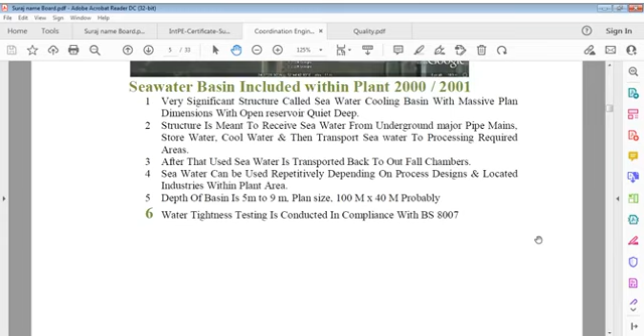So in this I have taken many of these projects which I am showing to you, these images, of my own projects, directly or indirectly I was involved. Only a few of these projects can I show to you that sometimes I was involved in during my career, and I'd like to discuss these with you.

It was constructed in 1986. I was on behalf of the contractor's agent for this, and this was my first major project, you can say, major in the sense of the Gulf, not otherwise. I did many projects before also, but not in the Gulf, GCC countries. GCC means Gulf Cooperation Council.

Gulf means there are countries like UAE, Saudi Arabia, Bahrain, Kuwait, Oman, and Qatar. This is a group of Gulf countries, all Arab countries. Here I joined GCC countries for the first time. Before that I had worked in Iraq and Libya, but due to some reasons I joined Qatar. Capital is Doha, a very small and beautiful country, of course.

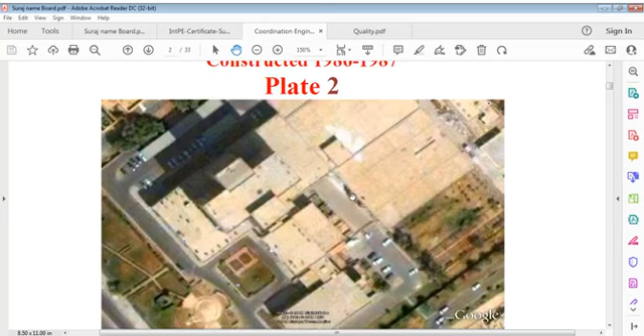This is the highest tower among this group, and I concentrated on this tower portion as well as other items on the other buildings. This was in 1980, 84, 83. This was good work.

As I said, in Qatar this is also the same, but here quality control was at a very high level. In fact, if I could learn something to an extent, quality is related - that's why I say here, quality engineering is related to coordination engineering. Coordination and quality both were there, not that there was no system.

I have seen, for the first time, thousands and thousands of documents - big size drawings, A0, and many piles, with no time to study them. Of course, we are not the main contractor here.

There was another company from whom our company got the subcontract, or you can say contract, for concreting - the structural contract. And it was not lump sum for this project, for us, not for the Jordan company. Whether they were lump sum or not, I don't know. We got this contract from them, and we had to take care of these items at unit rates, but technical work we had to do, and that was an important part - engineering work, whatever was possible in this construction, other than total engineering - construction engineering.

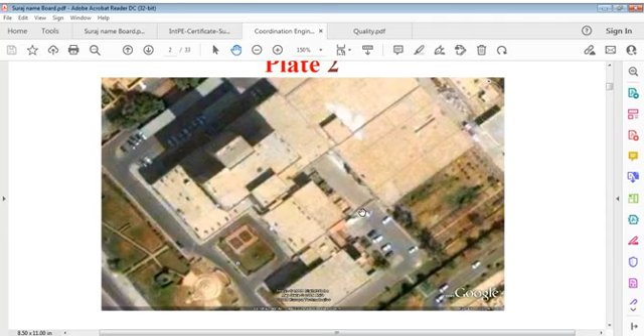Then after that I went to Libya, which I don't have any details with me. I'll just give you a brief reference of this. And this is a project photograph, this is from the ethylene plant. It was quite big, and I stayed on this project for about 3 years, dealing with structural concrete.

I was actually not project manager on this project. I was office engineer, project office engineer who deals with, you can say, quality coordination and miscellaneous types of works, or generally major technical office work, which comes to the responsibility or supportive responsibility of the office engineer. Until that time I could not understand what is office engineer. It means office activities were being responded to by the office engineer, and those activities.

First I joined this as a site person. I was taken into this job, and I was asked, do you want to do site work or do you want to do office work? I could not understand what they meant by that, but I said, whatever you want to give me, whatever you want to issue me, I'll do that, no problem. But then you tell us. Anyway, first push was to site. I was sent to site for work in that project.

I had many foundations to do, and I did that. Of course, I had some disputes with other foremen - they could not understand what I wanted. But we did work. I was involved in casting small foundations, combined footings, and also machine foundations, compressor foundations.

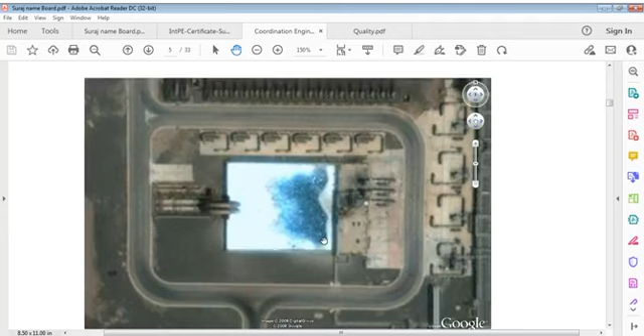There's nothing here, I'll give you that one, no problem. But let's just see what I'm talking about. And then plate 7, that's a small project, but a very important one.

This is a record house, a digital record house you can say. This is located in Qatar for client QP, Qatar Petroleum, and this is just outside the boundary of the operator Qatar Petroleum's side, the plant - this is the outside standby record center. It's called a very small building on a very small plot, but very strict.

I took over this site myself on behalf of our company, the contracting company, General Al Huda Contracting it was. You can see there is very small here, and here is the bound of this.

This is another big project on the other side of this, and here is all the residence, another building. So only this road is here, which is open to this site. This is the main building, this was the record building, very small but double story.

This is the guard house, a very RCC building, guard house. And here it is the service block - there are service blocks, transformers are put, electrical decompression and other provisions are put, pumps are put. And here's the water tank on ground, water tank, water reservoir. And then this boundary wall here, and there are such areas.

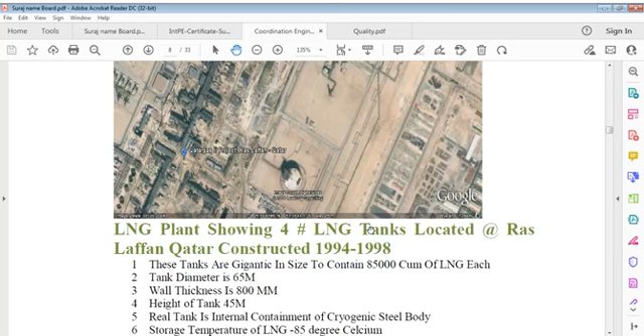I'll then go to - I'll read this all later, not now. I'm just trying to say what we do. So we come back to coordination engineering, which I'm talking about. I come back to these details. Let me go to what we're talking about. I'm talking about these projects. And again I say coordination is a must, it's a must, on every project it's a must. We can't do otherwise. If you don't have the will to do it best, let me take out this, put off this also. My switch off... battery.

Well, I think it's better to be very specific about it. Now, why am I doing coordination? The reason being, coordination - people don't understand in fact. I mean, they understand what coordination is, but they don't do it. And that's the drawback here.

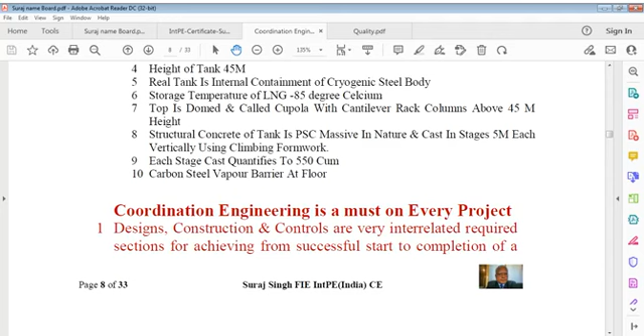Here I'm saying coordination engineering - this is important from each and every point of view. Let me blow it up a little more so you can see clearly. It's not coming in - I think it's coming in. It will come in like this. Okay, let us adjust this way. Let us keep 200 - okay, let me keep 180, that's better than 200.

So, okay, now why I'm staying on this - coordination engineering is a must on every project. It's a practical reason, a practical requirement. When I say titles are so much, this means here is so much. If we miss coordination, I think we do not work as engineers. I can say in that case that I'm not a good engineer if I don't coordinate. I'm not a good engineer if I don't worry about quality. And that's a very important point.

Some people may question why I'm raising this issue. Yes, I can answer that very easily: coordination is actually not seen. Coordination can't be seen as it is ongoing. Work only tells you that something was done. You can draw many drawings, all discipline drawings.

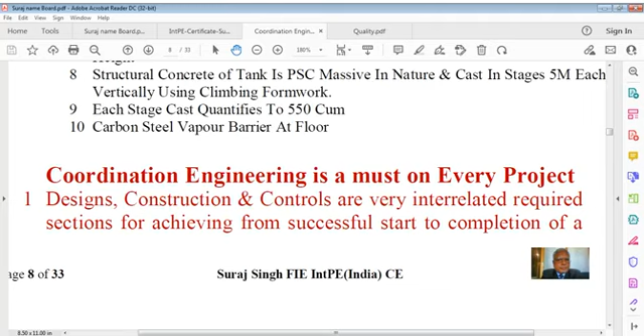People do not use this word in their life because they do not know its meaning. No issue - but design, construction and controls are very interrelated, required sections for achieving successful start to completion of a project, which must be applicable throughout project stages, with all works smoothly effective. Designs may be considered oversafe or optimum, but real construction involves actual expenses. So these are, I'm just reading what was already discussed, just to refresh what we have to discuss, the basis of that.

I'm just giving you input, as I gave last time also. Designs may be considered oversafe or optimum, but real construction involves actual expenses, contract time, financial liabilities, and building professional reputations. It should be a certain motto of an organization to apply good controls on the project so as to keep in line to schedule, planning being an actual part of controls.

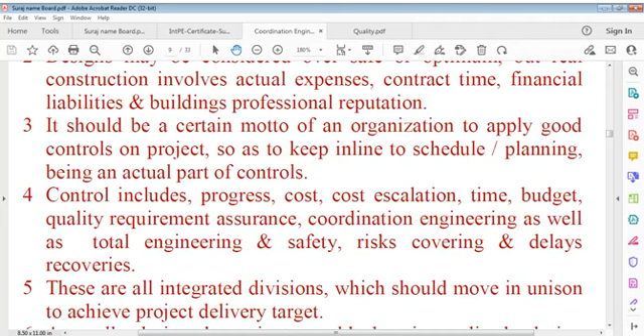Control includes progress, cost, escalation, time, budget, quality requirement assurance, coordination engineering as well as total engineering and safety, risk cover and delays - whatever. These are all integrated divisions which should move in unison to achieve project delivery target. A well-designed project could be jeopardized during the construction phase, from a budgetary viewpoint, if not given due required controls application properly - without organizing with full intensity, these types of problems can occur on a project.

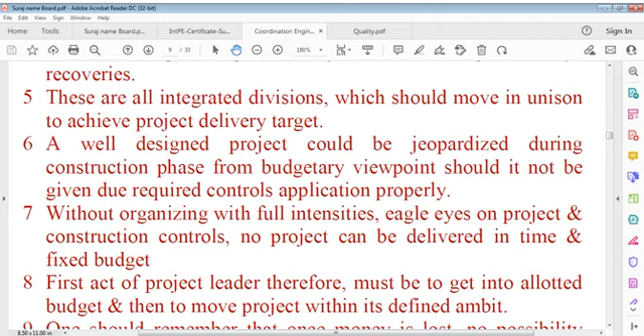And construction controls, you may say, no project can be delivered in time, in fixed budget. First act of project leader therefore must be to get into allotted budget and then to move project within its defined ambit. One should remember that once money is lost, no possibility exists to retrieve that lost money back.

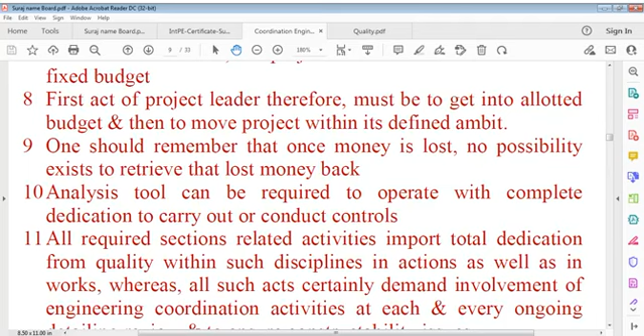Analysis requirement tool can be required to operate with complete dedication, carry out or conduct controls. All required sections related activities import total dedication from quality within such disciplines in actions as well as in works, whereas all such acts certainly demand involvement of engineering coordination activities at each and every ongoing detailing survey, detailing review, and to ensure constructability issues. So constructability is going to be main in this, it cannot be compromised at all. If you compromise that, you compromise everything. That's what I say.

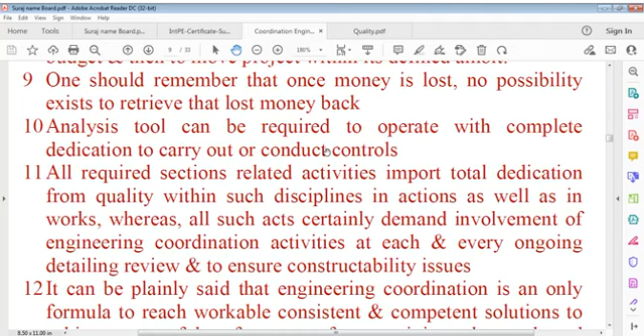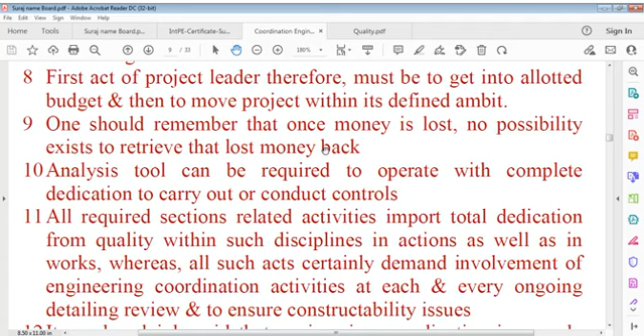So we may say, analysis tool can be required to operate with complete dedication to carry out conduct controls. And we have to understand all this, that once money is lost, no possibility exists to retrieve that lost money back. All these points you have to keep in mind. So we can say otherwise that

all required sections related activities import total dedication from quality within such disciplines in actions as well as in works, whereas all such acts certainly demand involvement of engineering coordination activities at each and every ongoing detailing review and to ensure constructability issue.

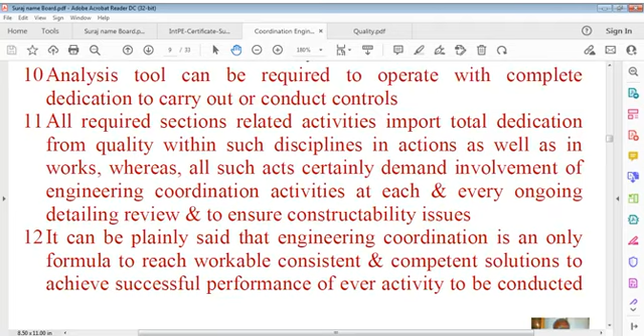It can be plainly said that engineering coordination is the only formula to reach workable, consistent and competent solution to achieve successful performance, of every activity to be conducted to avoid possible delays.

Actually, this is just an introduction. I had to go on in what we have to do. That is why we are here, to be clear about coordination. And I think people understand this, but I don't know to whom they leave it, to coordinate. Coordination is known to everybody. It's not known. Some understand this, some don't understand this.

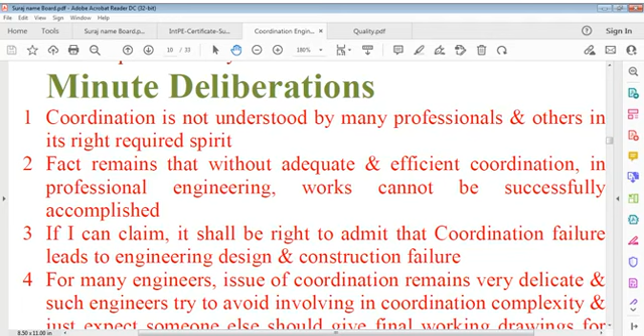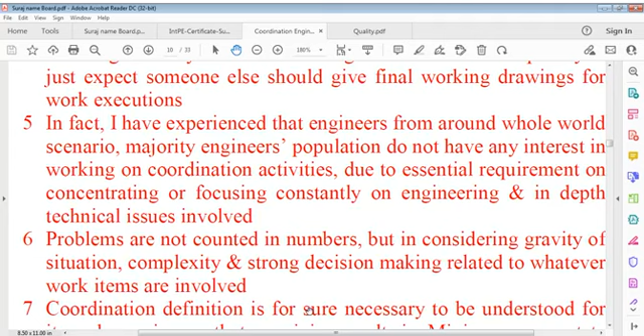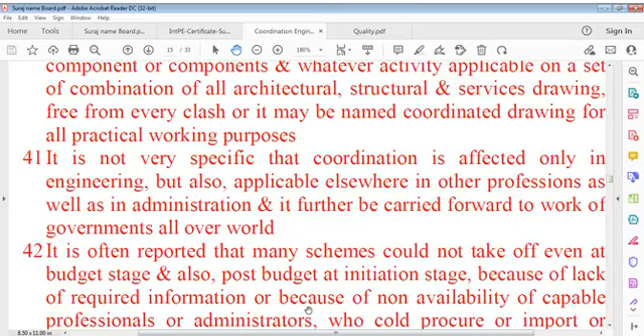But it's not formally decided, I can say that. If you go further on this, I'm not going to read all. We leave it to everybody else. But what we are going to do is that we have to. I reached up to some points last time. Which point I should start with? Let me see which is best for us to understand. 48 and 47. Let's say from here we can take.

While handling engineering projects, every engineer has to rely on certain specific disciplines. I'm just reading from here. While handling engineering projects, every engineer has to rely on certain specific disciplines or branches of various engineering disciplines.

So we have at least 15 branches of gross engineering and building engineers, or architectural engineers, or civil engineers, or structural engineers, or electromechanical engineers, security related engineers, information technology engineers, etc., as well as to carry out execution work at supervision level as well as at construction level.

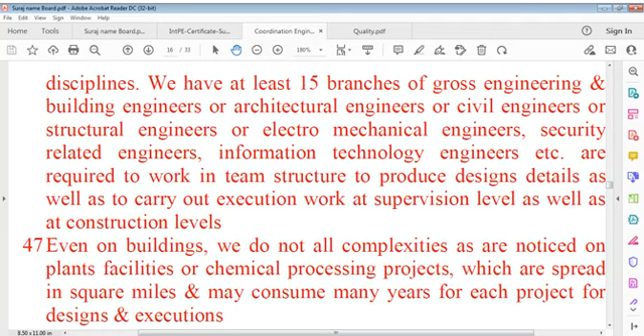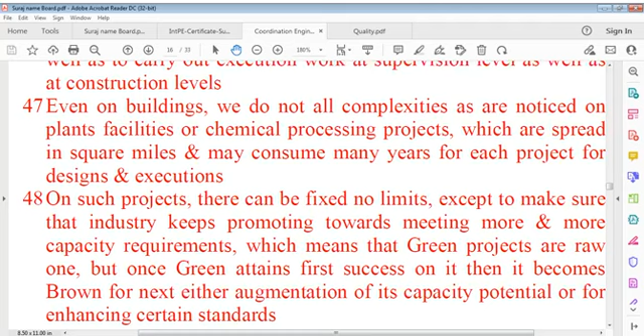Now, even on buildings, we do not see all complexities as are noticed on plants, facilities or chemical processing projects.

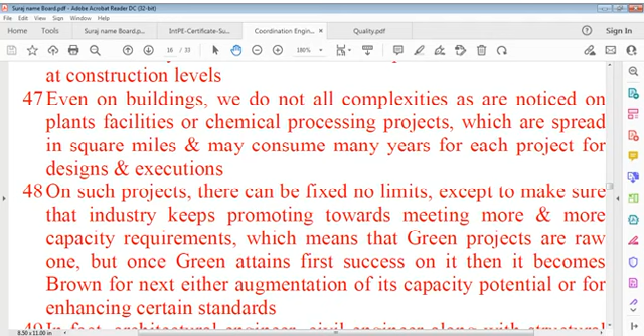On such projects, there can be fixed no limits, except to make sure that industry keeps promoting. Yes, you can keep promoting. Why say here, on such projects there can be fixed no limits except to make sure that industry keeps promoting towards meeting more and more capacity requirements, which means that green projects are now a raw one, but once green attains first success on it, it becomes brown for the next place.

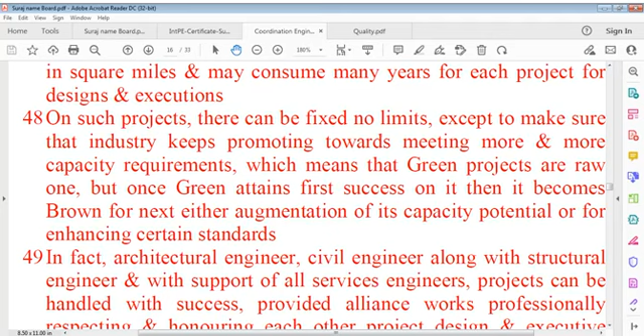Very, very serious issue. This is really coordination. It's not easy. You cannot perform it. Even if you're a doctor, you cannot perform it. If you don't have experience, I'm saying.

In fact, you can say on such projects there can be fixed no limits except to make sure that industry keeps promoting towards meeting more and more capacity requirements, which also means that green projects are raw one, but once green attains first, you can say success on it then it

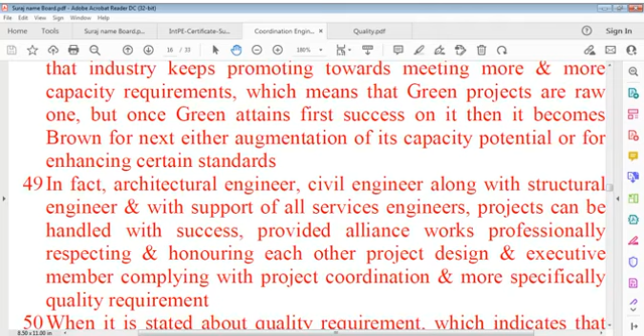That's in fact architectural engineer, civil engineers also, along with structural engineer and with support of all services. Engineers, projects can be handled with success, provide all the alliance works professionally, respecting and honoring each other, project design and executive member, complying with project coordination and more specifically quality requirement.

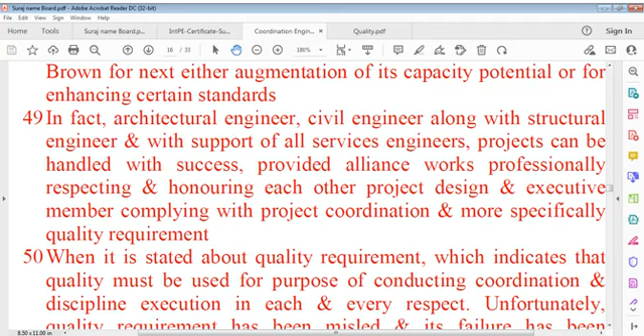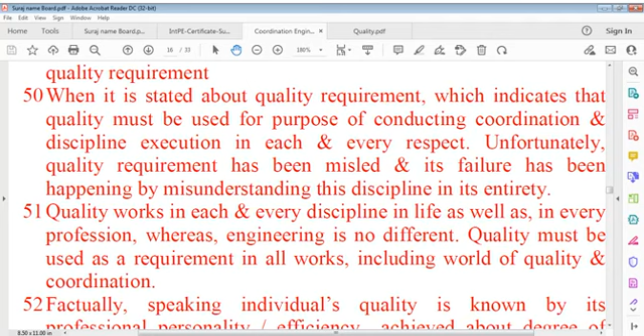When it is stated about quality requirement, which indicates that quality must be employed or used for purpose of conducting coordination and discipline execution, has been misled, or you can say, and its failure has been happening by misunderstanding this discipline in its entirety.

Quality works in each and every discipline, in life as well as in every profession. Whereas engineering is no different. Quality must be used as a requirement in all works, including world of quality and coordination.

Factually speaking, an individual's quality is known by its professional personality. Efficiency achieved about degree of work or production. Quality one possesses, and then further assessment can be calculated or charted out.

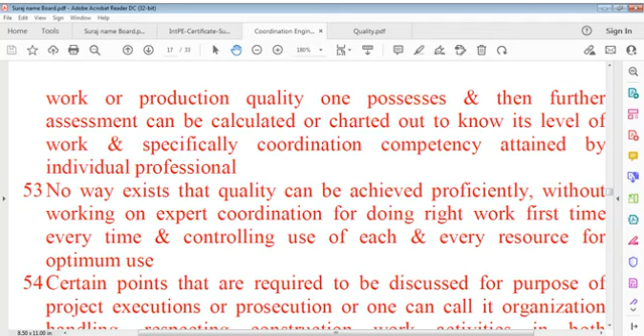So we have such points here, certain points that are required to be discussed for purpose of project execution or prosecution, or one can call it organization. Handling, respecting, construction work activities in both disciplines of site work as well as coordination, without which works cannot be completed in each and every respect.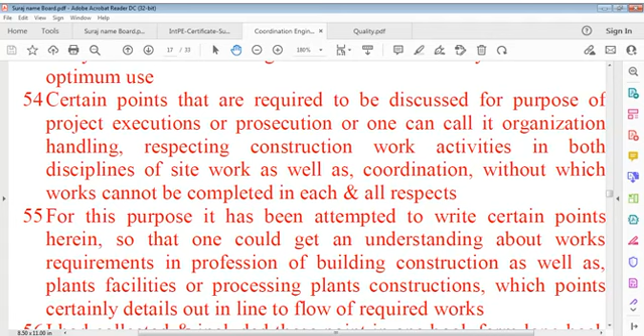For this purpose, it has been attempted to write certain points so that one could get an understanding about work requirements in profession of building construction as well as plants facilities or processing plants construction. Each point certainly details out in line to flow of required works.

I had collected certain information and included this point in one book long back. It has been too long, yet works are not changed in terms of quality and coordination despite availability of digital world everywhere.

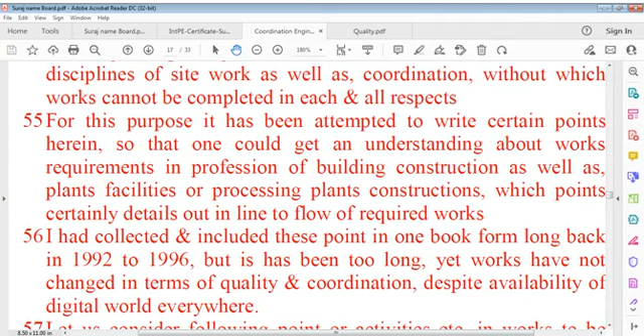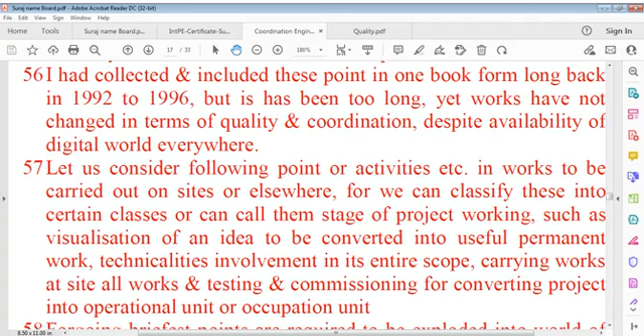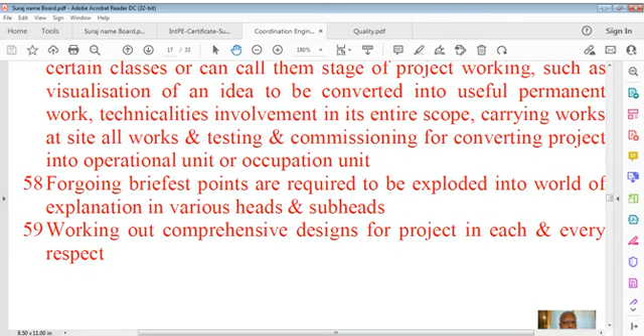Here we can say the foregoing briefest points are required to be exploded into world of explanation in various heads and subheads, working out comprehensive designs for project in each and every respect.

Now, designs include architectural details, structural details, service details, internal and external landscape and utilities, and many more without any fault. We have to do that.

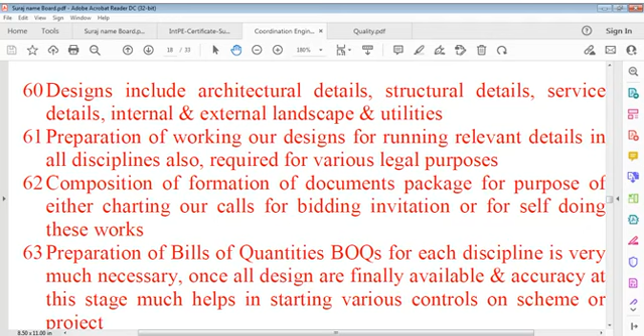Preparation of working designs for running relevant details in all disciplines also required for various legal purposes. Formation of documents, package for purpose of either charting out, calls for bidding, invitation, or for self doing these works. Preparations of bills of quantity for each discipline is very much necessary.

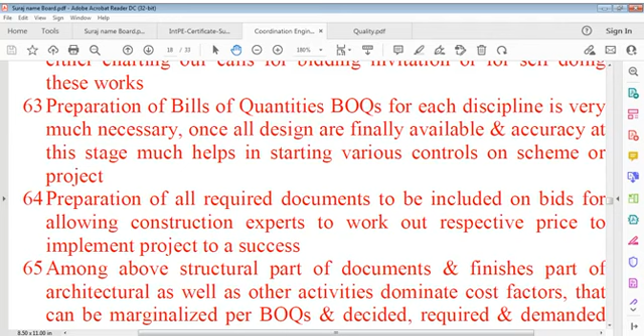Once all designs are finally available, and accuracy at this stage much helps in starting, much helps in starting various controls on scheme or project. Preparation of all required documents to be included on bids for allowing construction experts to work out respective price to implement project to its success.

Among above, structural part of documents and finishes part of architectural as well as other activities dominate cost factors that can be marginalized per bill of quantities and decided required and demanded specifications pertinent to all disciplines involved.

Indeed, aforesaid expressive heads amount to voluminous work quantum, but it's necessary for every control on construction time, duration, required cost necessary, and standard of quality requirements, which would be dominated by sort of specifications to be included.

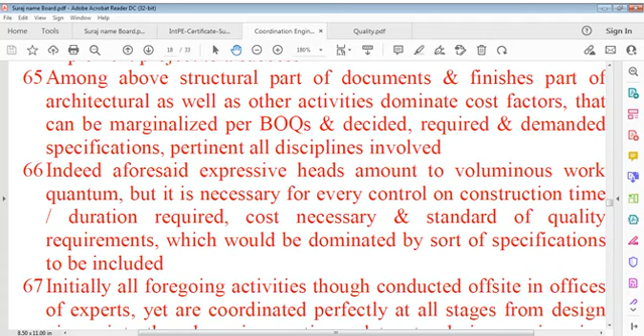Initially, all foregoing activities, though conducted off sites in offices of experts, yet are coordinated perfectly at all stages from design viewpoint, through major portion relates to design engineering domain and quantity engineering also so called estimation. Designs within this stage must be coordinated correctly to an extent possible among various disciplines, say between architectural and structural discipline, structural and services disciplines, and all other disciplines, whatever being involved.

Total concept of constructability, buildability must be taken care of during all such designs and designs are involved.

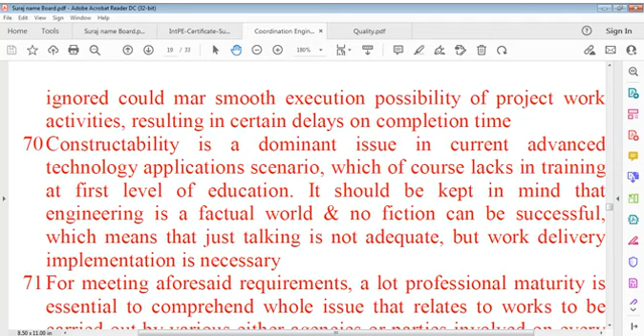For meeting aforesaid requirements, a lot of professional maturity is required, essential to comprehend the whole issue that relates to works to be carried out by various agencies or parties involved on every project, from conception stage to design stage to construction stage, and then finally to delivery.

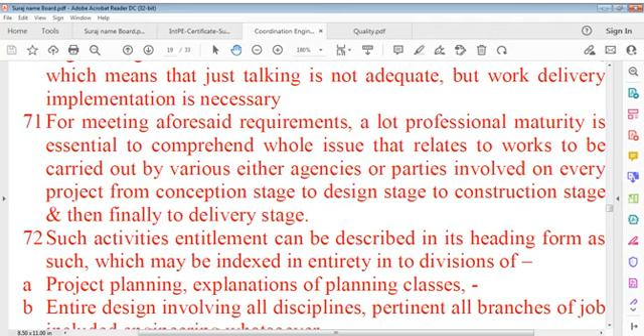Such activities entitlement can be described in its heading form, which may be indexed in entirety into divisions of planning, explanations of planning classes - that can be one part - and entire design involving all disciplines pertinent to all branches of engineering whatsoever.

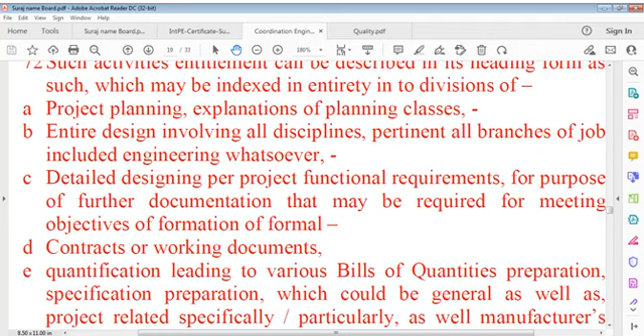We may say detailed designing per project functional requirements for the purpose of further documentation that may be required for meeting objectives of formation of formal contracts or working documents, leading to various bills of quantities preparation.

Specification preparation, which could be general as well as project related specifically, particularly as well as manufacturers related procedures.

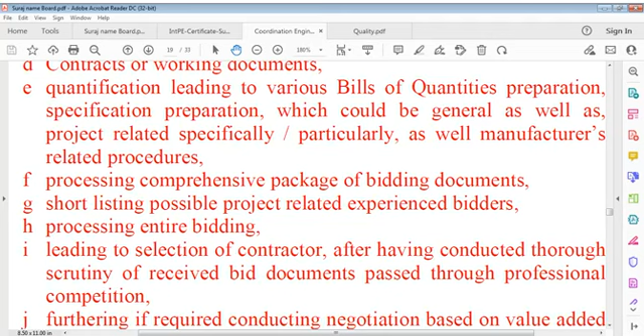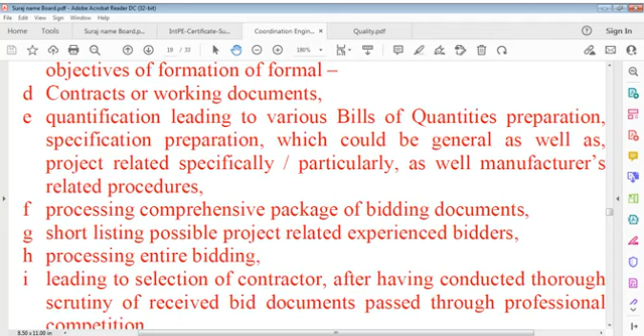Processing comprehensive package of bidding documents. Shortlisting possible project related experienced bidders. Processing entire bidding leading to a selection of contractors after having conducted thorough scrutiny of received bid documents passed through professional competition.

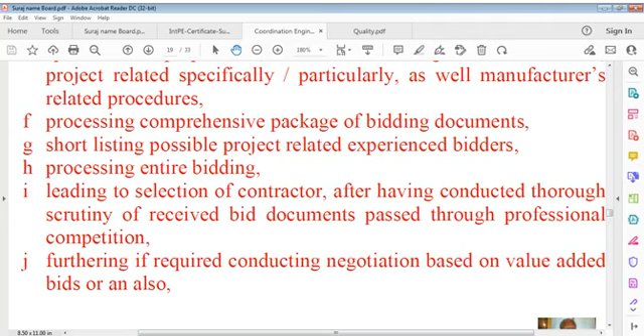Furthering, if required, conducting negotiations based on value added bids and also received alternative bids. Formal declaration of appointment of contractor, which could be either in construction status or in EPC status, depending on requirements.

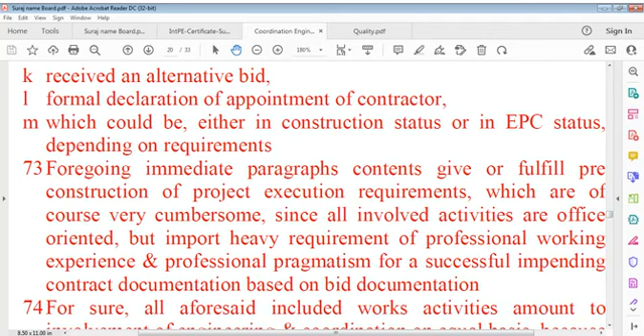These foregoing paragraphs' contents fulfill pre-construction project execution requirements, which are of course very cumbersome since all involved activities are office oriented, carrying a heavy requirement of professional working experience and professional pragmatism for successful impending contract documentation based on bid documentation.

For sure, all aforesaid included works and activities amount to involvement of engineering and coordination on equal basis, because if one is missed, others shall also miss, which criticality must be considered seriously for reliable documentation.

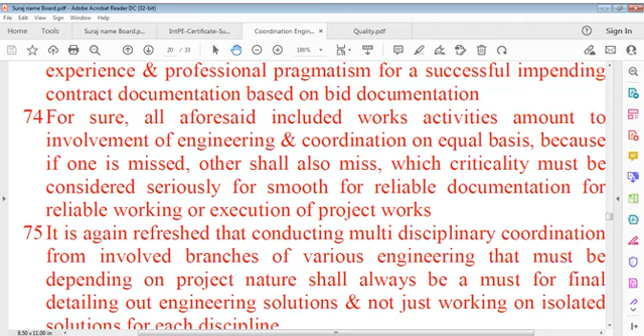It's again refreshed that conducting multidisciplinary coordination from involved branches of various engineering, depending on project nature, shall always be a must for final detailing outcome - detailing out engineering solutions and not just working on isolated solutions for each discipline.

This requirement is often missed by many juniors or budding engineers or professionals due to lack of project experience. But once one gets a certain project delivered and considerable engineering is attained...

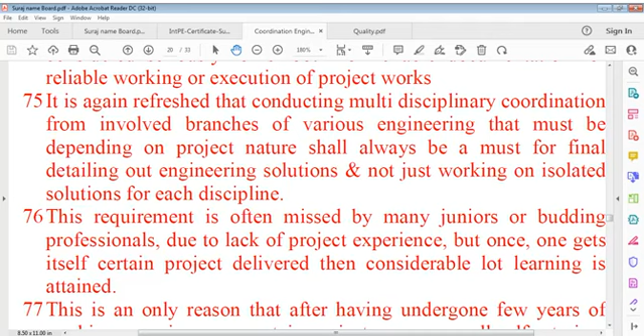This is the only reason that after having undergone few years of working experience on certain projects, one can call oneself a junior or trainer to oneself, and then trainers towards others, which wealth earns one's self-confidence.

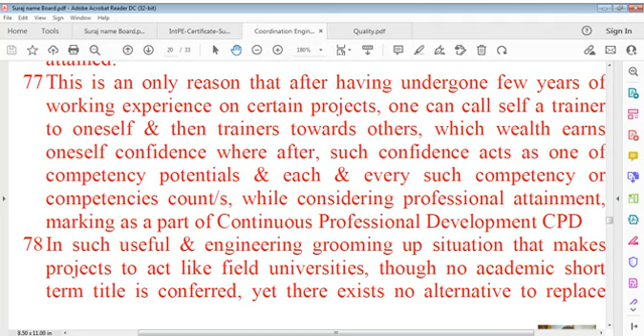Whereafter such confidence acts as one of the competency potentials, and each and every such competency counts while considering professional attainment, making it a part of continuous professional development.

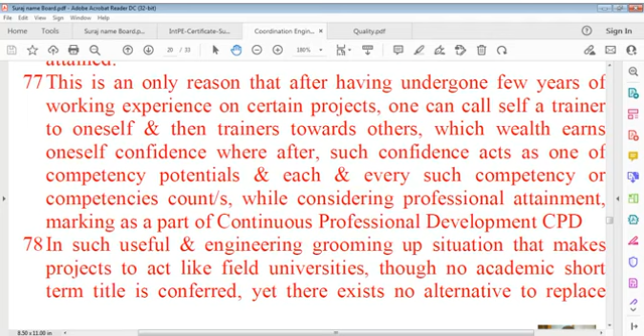In such useful and engineering grooming up situation that makes projects act like field universities. There's no academic short term title for it.

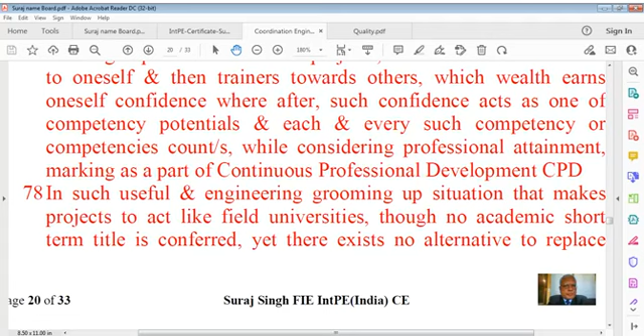In such useful and engineering grooming up situation that makes projects act like field universities. There's no academic short term title. Yet there is no alternative to replace such reliable training from elsewhere, because such project related organization equips incumbent professionals, the executives.

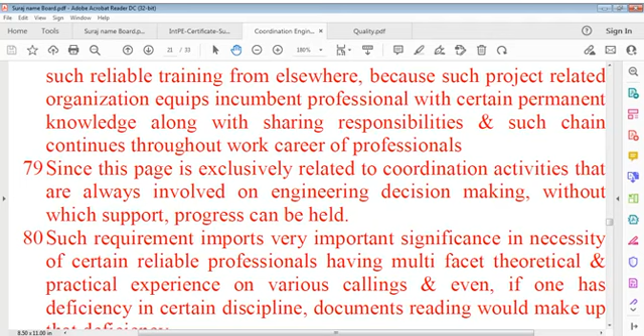This requirement imports very important significance in necessity of certain reliable professionals having multifaceted theoretical and practical experience on various callings, and even as deficiency in certain discipline, documents reading would make up that deficiency. It's also certain facts that coordination is individual scrutiny oriented, without requiring any interruption, to enable the incumbent coordinator to concentrate continuously for whatever issues, until resolution is reached.

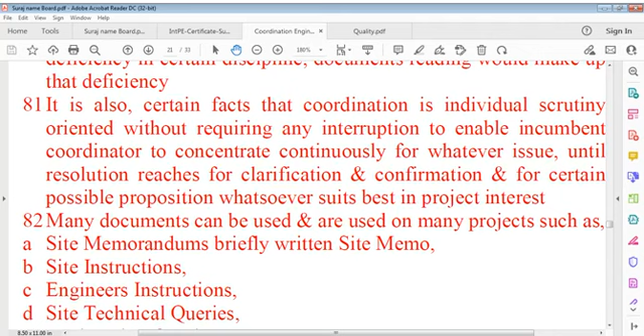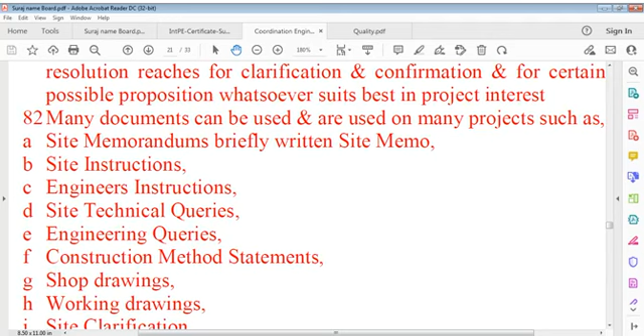So you can say, as I said, documents that can be used, you have to produce. Many documents can be used in many projects, such as: site memorandum, briefly written site memo, site instructions, engineer's instructions, site technical queries, engineering queries, construction method statements, shop drawings, working drawings, site clarifications, certain confirmations, etc., whatever suits to involve the problem or issue in consideration. These are important points. We have to be realistic about that.

Okay, and also it's an important issue, you can say. Temperature is 12 degrees currently, 89% humidity. You see, its current stage is 12 degrees. I just checked this for my own issue, and it's really sometimes very important to know it, for whatever reason. We have to get it, we have to understand it, we have to understand that. If you don't do that, that's a bit problematic.

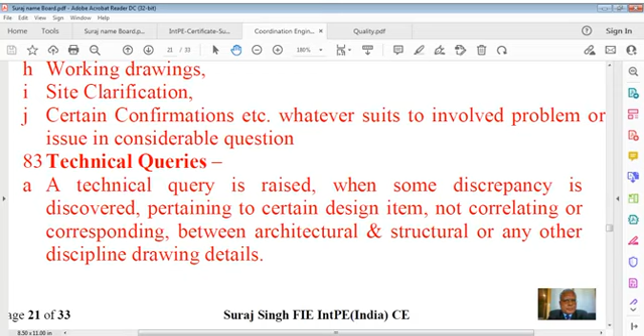These are certain specifics we have to discuss in detail. You cannot just jump onto titles only. That's why here is a list we have given, which is very important from every point of view. Many points are here and many more will be added, because for purpose of coordination we have taken site memorandums, site instructions, engineer's instructions, site technical queries, engineering queries, construction method statements, shop drawings, working drawings, site clarifications, and certain confirmations to resolve issues or questions. We have to go a little into depth of that.

Because we have to discuss this in length, we have to go into background also, to understand that it's not simply studying, we have to research every part of it. So just hold on please, let me take a glass of water.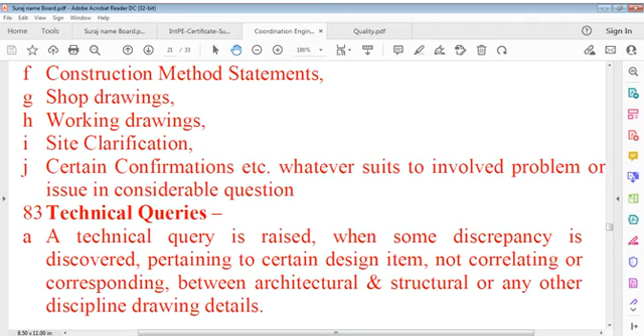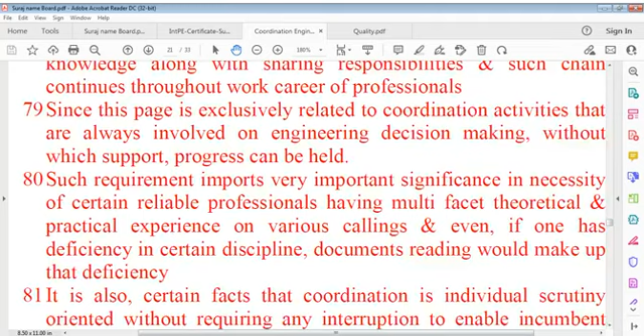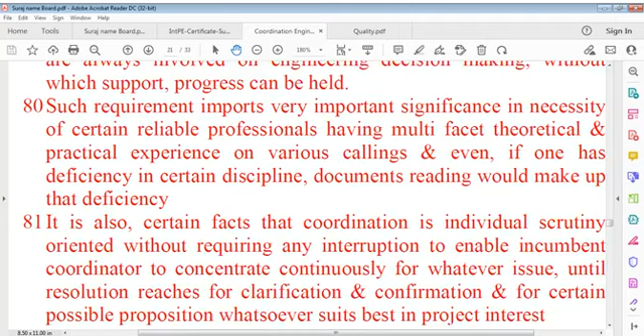It's very elementary I'm talking, but it's important. So we can say we are talking somewhere in bills of quantities. I don't exactly remember where we took it, but wherever it is, it has to move very perfectly so that we understand this documentation. Maybe it's not here, but we have to cover it anyway. What I say in its essence,

all disciplines of building or structure, as the case may be, are included in one bill of quantity in general sequence. What is that? Excavations - I'm just naming nominally, there can be others too. The major ones are excavation, backfill, or in short earthwork, concrete works, reinforcements, forms, blockwork, brickwork, metalworks, woodworks, electrical engineering, plumbing and drainage, decoration, finishes, miscellaneous, and other works, all summarized to conclude the package sheet of the bill.

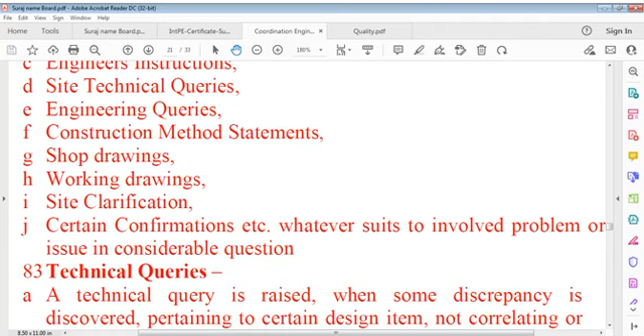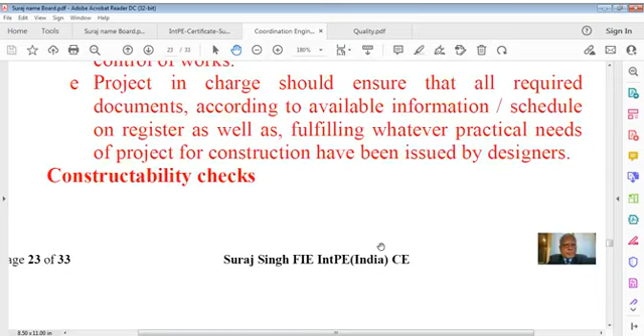We have to go through this, understand what's technical query, and documentation appraisals. I'll take up that specific continuation. As to site queries, for example site technical query, we have to understand what is query, technical query, as I say in this documentation. Technical query is raised when

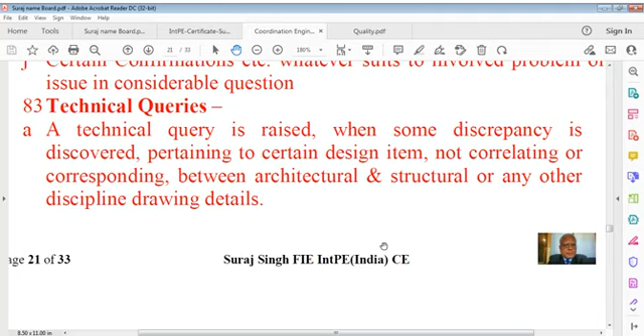some discrepancy is discovered. Discrepancy means what? Discrepancy in technical detail pertaining to certain design items not correlating or corresponding to architectural and structural or whatever else discipline design details, and we have to take that into account.

For resolution to reach correct detail description, discrepancies are raised in form of technical query format, giving full details regarding the discrepancy, and if possible a solution be either proposed or clarification sought or understanding for confirmation made.

This document is originally produced by the relevant site engineer through the office engineer, if the office engineer position is established, or further checked by the technical or engineering section duly authorized by site organization management for transmission to the engineer for response, and finally consent obtained for works on site.

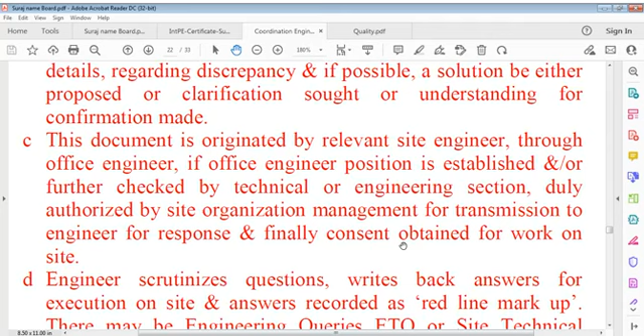Then the engineer scrutinizes questions, writes back answers for execution on site, and answers are recorded as red line markups.

This may be engineer's queries—we call it ETQ, engineer's technical queries—or site technical queries, STQ, or SC, that can be site clarification, dependent on the mode of format adopted on the project. ETQ, engineer's technical query, is generally used by the engineering team only, while site technical query STQ is used for site execution purposes.

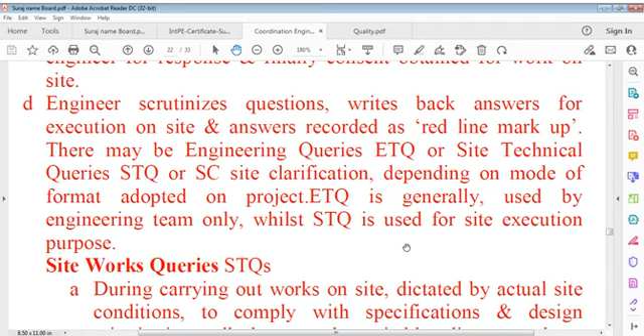We are talking of quality engineering and coordination engineering, and we can't go without that. We have to do a lot on that. Quality engineering and coordination engineering is the root for successfully working, and we require to establish permanently engineering professions in all other walks of life.

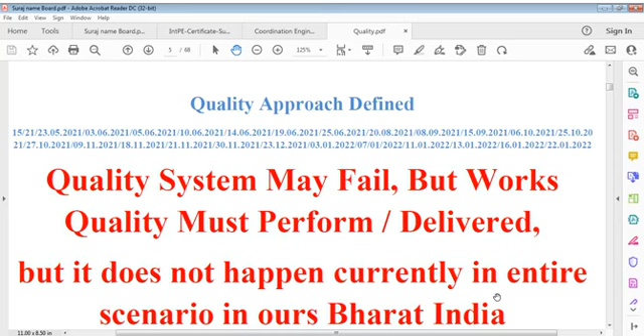So we talk of quality and coordination in a combined way. We have to understand how to form a system, including all systems, and we have to really have an understanding of these. Coordination engineering has to be displayed in a perfect way so that we can coordinate properly and understand where we stand in the professional world.

Coordination is, of course, a very extensive term. It has many forms, many technicalities. Sometimes it's too difficult or almost impossible. But as I said, I did a lot of work in that, and coordination on this project—

So I'll say we'll continue this, because issues never close and these go on and on. We have to understand them in spirit and requirement. We cannot simply close an issue. And of course, this is a very smart project.

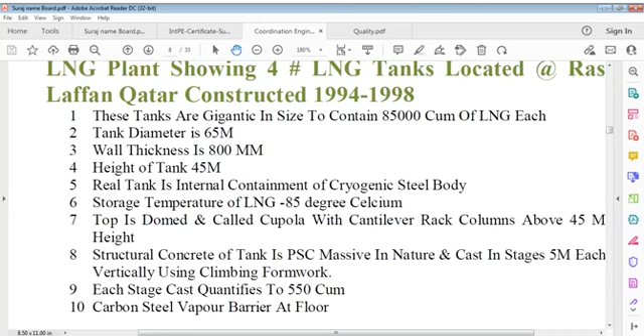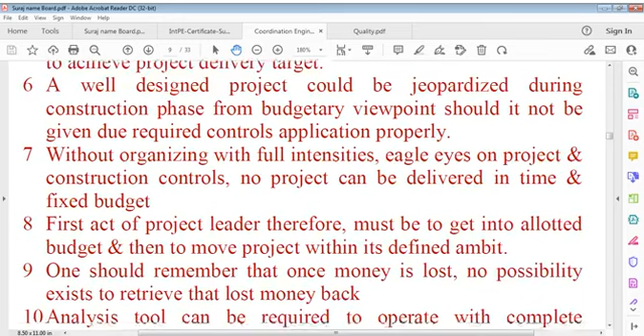Many other projects are there, but I don't have data of that. Whatever we have, we'll try to show, and this detailing we'll discuss—how we did it. Coordination engineering is a must, cannot be taken for granted. The world is the world and the job is the job; it can't just be closed, we can't close our eyes, and we have to be very serious about every issue.

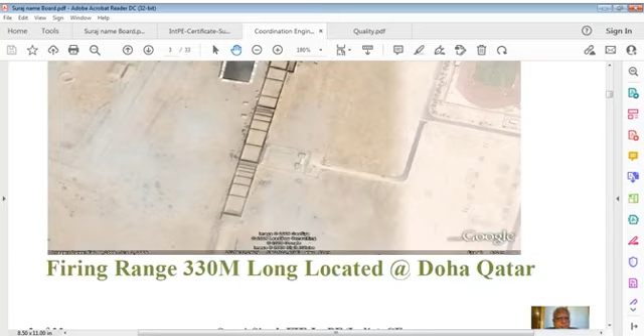What I say is that we take now—it's in such a way that many such documents—and it's really worth seeing that, in our way, in our style, in our walks of life, and we have to do that.